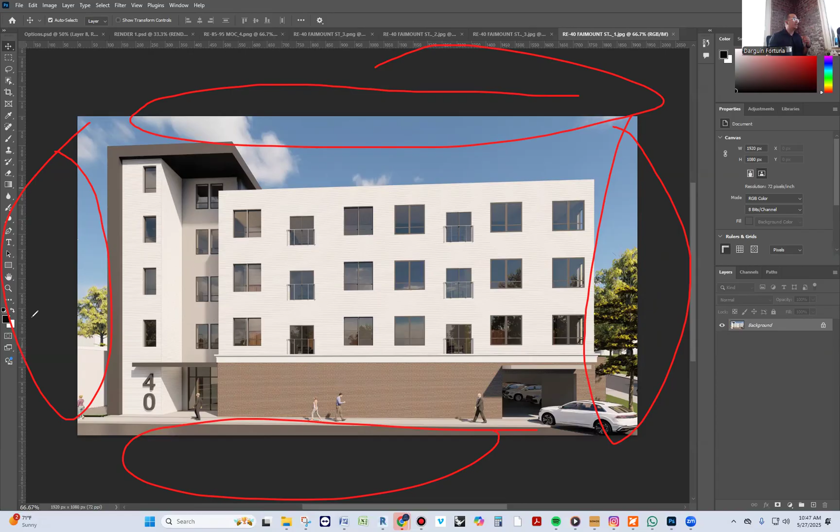So this crop is a little too tight to the building. That's one issue - it doesn't give room for the imagination to see the landscape, how I can walk through it. The other thing it doesn't do is give the person putting together a presentation enough room to crop. You can't really crop much or reduce it because it's limiting. Sometimes giving more sky and ground so people can crop around it helps the designer work with it and have a little more room.

There were a couple things though that I corrected on some of the previous iterations which I want to apply on this one. If you think about this facade, it's about 80% or 70% windows. When you have all these windows, before they were black and didn't tell a good story - they looked black, didn't show the sky. This one shows a little bit of the sky and it feels so much better.

So this is an amazing improvement from the previous ones. The previous ones looked all black. We do not want to do that. We want to make sure they feel alive, that they feel vivid.

So we talked about the cropping - let's enlarge it a little bit. We talked about the windows - let's make it a little bit more bright.

All the things you can do - although this one doesn't have that problem - don't ever cast shadows on your building. This one is fine, it's not too much because it gives perspective, but don't show your building in shadows. Make sure you move the sky or the sun so it doesn't show any shadows.

Another thing I wanted to add: I like to show as little clouds as possible. I do not like seeing clouds in any of the renderings because clouds are scary, are creepy.

Like, oh, it's gonna snow, it's gonna rain, it's not happy. It's against anything that's happy.

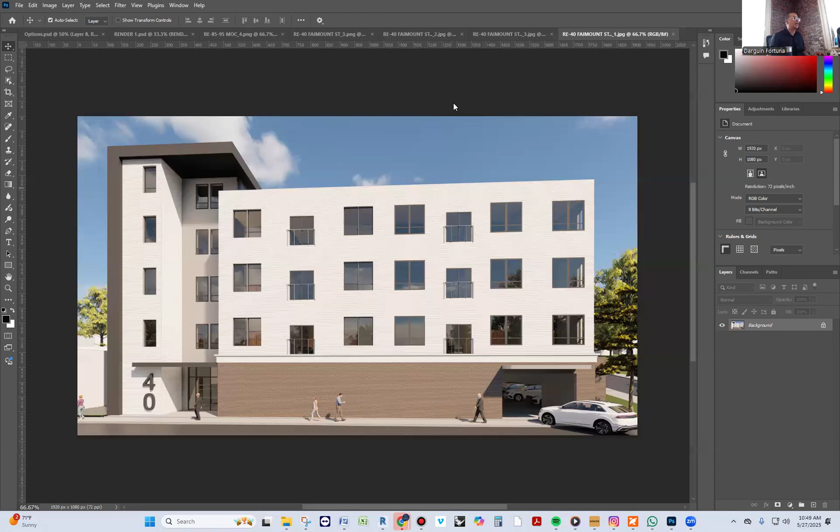So that would certainly help. This is not too bad. I would probably still go to the left a little more, to the right a little bit more, and maybe more to the sky. The ground seems to be fine. And I don't want to be subjective, I want to be objective. So what I mean by the ground seems to be fine, I don't like to see too much sidewalk - I mean too much asphalt. So this is not too bad.

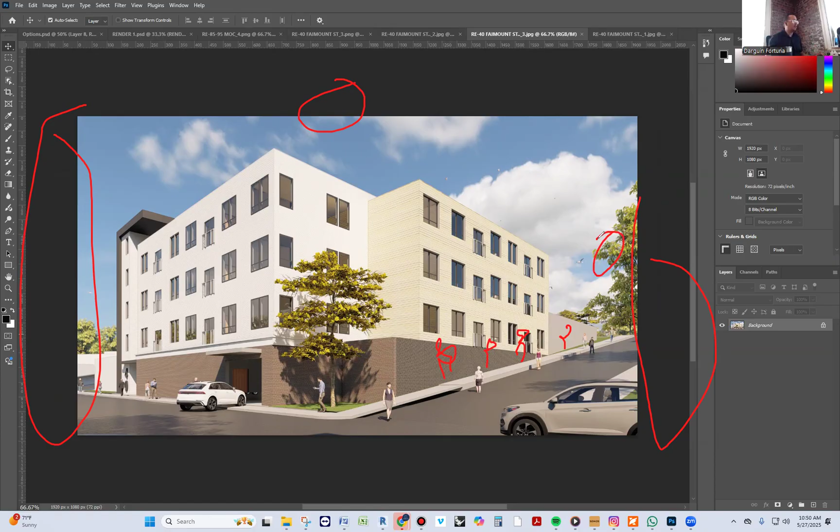It's just enough. But some trees, even here, some trees - the eye just really likes to see landscape, nature, happy. The fact that this tree is kind of yellowish doesn't help me that much. Having it a little more green, more happy. This is perfect right here. This one's really good. It's just having that nice feel of happiness that we want to see on the building. We want people to be excited about the building.

And then overall, the people seem to be okay. I like to see families walking, kids walking, things like that - that's happy. These people have no purpose. This old lady seems to be underground - half of her leg is underground. So it's like, it feels like, tell me a story about this. This guy with his phone is fine, he's cool. This lady here, kind of lost, a little weird.

Plus, you don't walk like that, by the way. You wouldn't walk in the middle of the street - that's called jaywalking. So you would want to have a sidewalk or a crosswalk, they call it here, and some sort of crosswalk in here too. And they don't walk randomly on the street - they will be walking randomly on the sidewalk, but they wouldn't walk randomly on the street. You're like, Dargun, why are you paying attention to that?

It's just all of these things - think of it as a symphony. Every note, every instrument tells the same story. If one instrument starts sounding out of tune, you feel it in your ears. So the eye also tells you something isn't right about this. This doesn't feel right, this doesn't feel right.

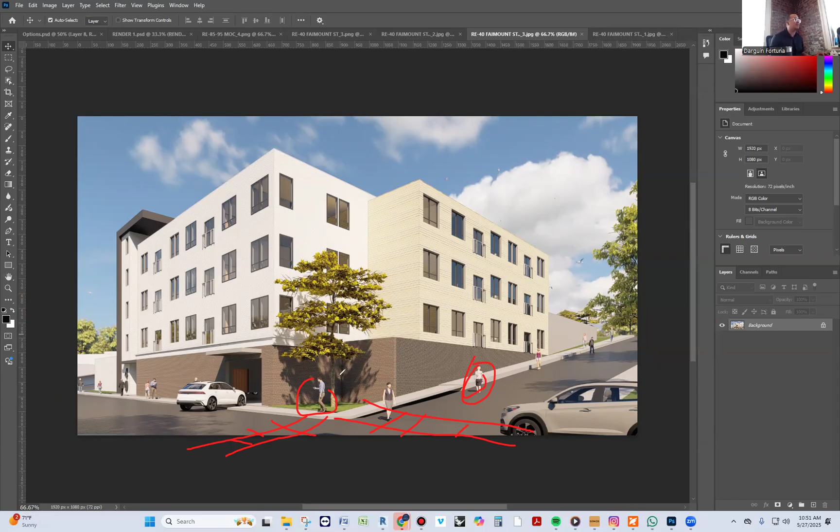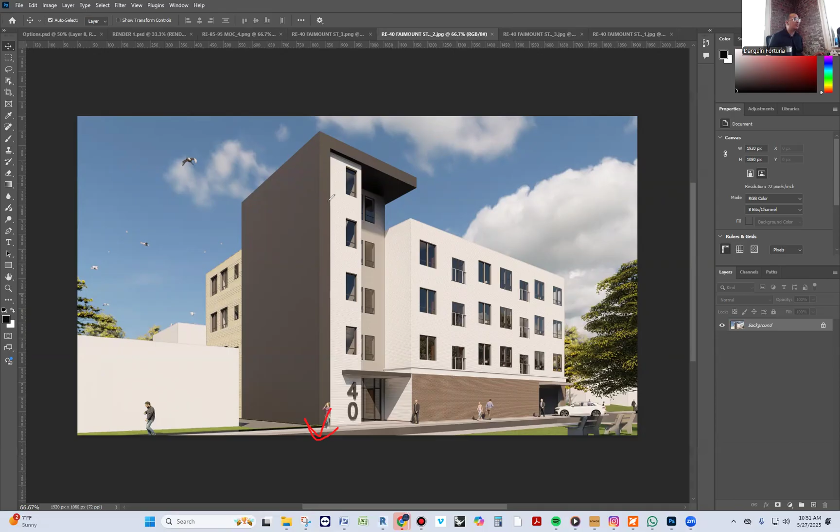So overall, this one is not too bad either - it's an improvement upon the previous one. The windows are better than black, things like that. This one, I need a little bit more ground, and I just told you I don't like to see so much asphalt, but this one is cropped too close, so it doesn't give me, and a little more sky. Because if someone makes a mistake cropping it, then it's a problem there.

Maybe I will crop less of this side because this building doesn't matter so much. Just a little less, more on the ground, a little more on this tree. And why not put a tree here? We don't know what's going on with this existing building, we don't care about it. But just make it a little more happy, more fluid, more fun. And I'll show you a couple of things you can do very quickly that will improve all of these renderings.

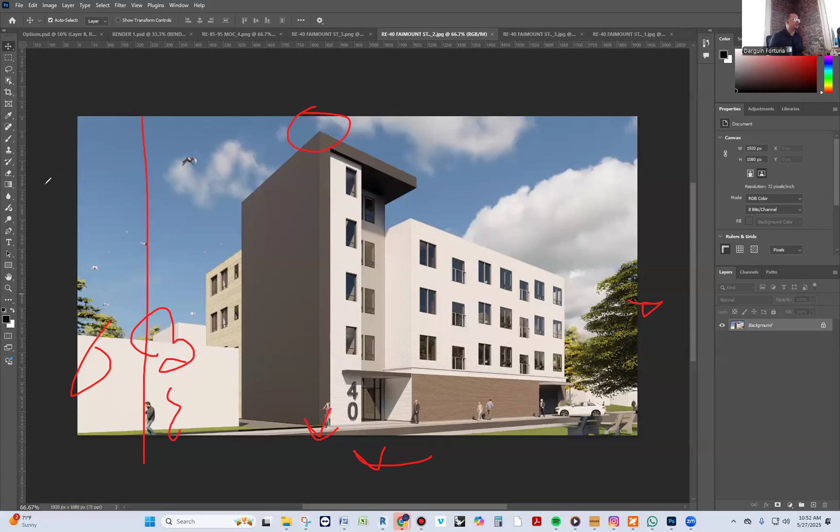Okay, so that's that. These were some of the, I think, old ones. So you see how black - these two, both of them have this dark, sad feeling to it. Very kind of like almost fall - the trees' leaves are kind of about to fall. It just doesn't feel right.

By the way, this is not framed wrong. This is good. This is enough space here, almost enough space here, a little more higher, and you're golden. This is a very good view, very nice view, very welcoming view. I like this view very much.

I really do, and I think it tells a little bit of the story of the building too. Random thing, this seems to be flat versus this that has some texture. Not sure how that happened.

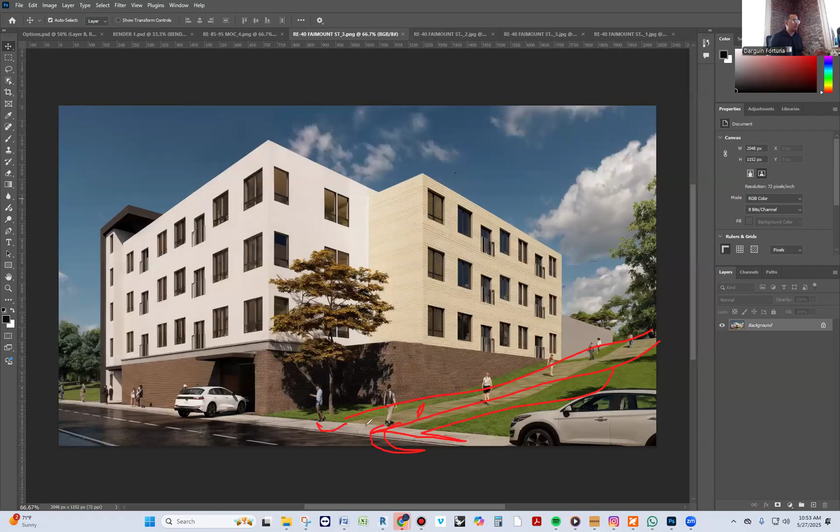This is a street, so this is kind of wrong, right? This should show a street. This seems to be wrong. But the view doesn't look too bad, just be accurate. Like, is this a street? Wait a minute, why isn't it cut here and a curve here? Try to figure out how to show that street as much as possible.

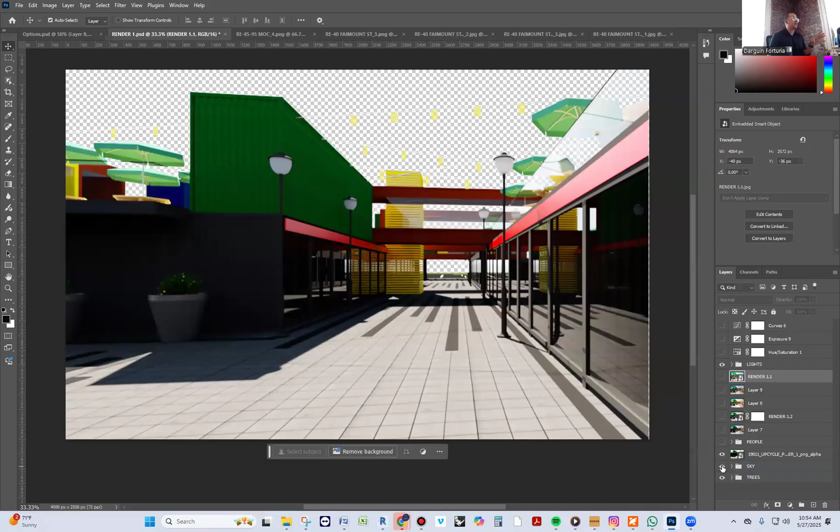So the first thing I did was add a sky. This one didn't have a good sky, so I added a sky. Then I started working on adding people into the scenery. Started adding people into the scenery.

By the way, I grouped all of this, so let me show you. So I started adding people, the guy with the dog looking at the signages and things like that. You're like, well, that's a lot. Let me just go little by little so that you can distinguish it, because it takes a little bit of effort to see all of the things I added.

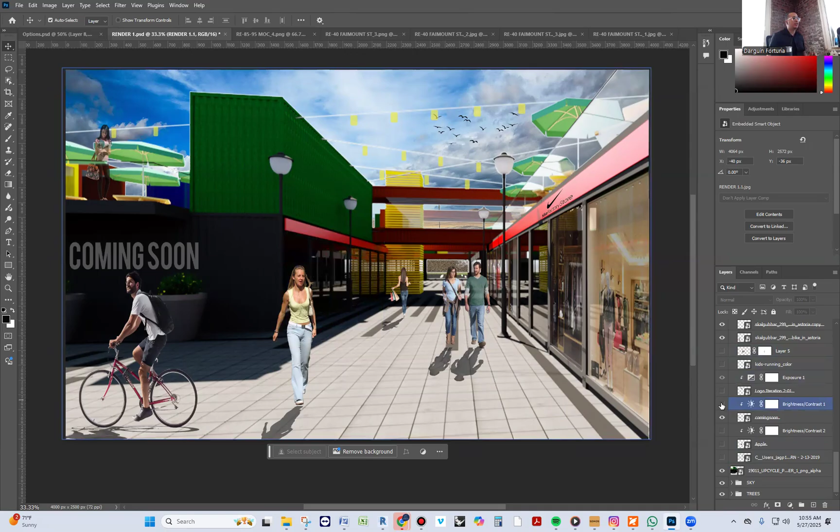And you're like, well, that takes a lot of time. It doesn't have to, it actually does not have to take a whole lot. So just be strategic and have a plan for what it is that you're doing. Before, the plaza had no story being told about what stores could be there, about people shopping, about being something vibrant and happy. It had no story whatsoever.

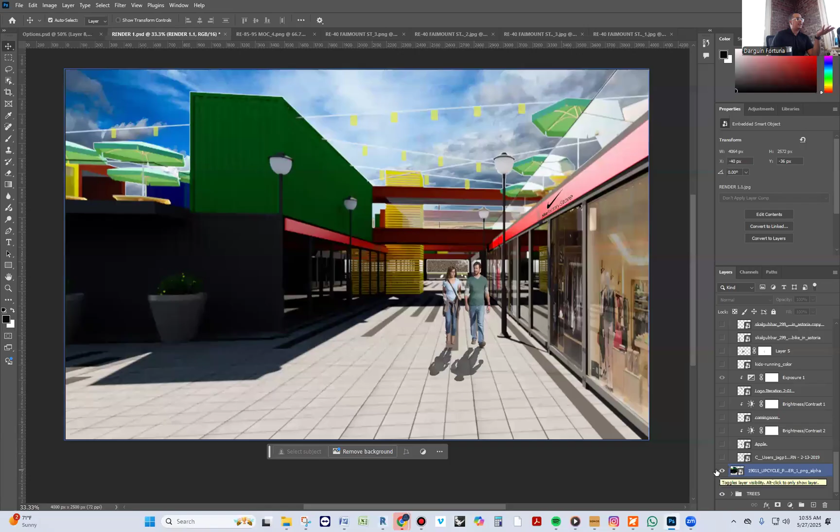So then I started adding people walking, and I created the shadows for the people myself, looking at the fact that the building has shadows like that. Then I started to add the logo, the Upcycle logo, and pop it up a little bit.

Then I like to overlay lines. So if you can figure out a way of getting the same view and getting the line work from Lumion, do that. So I overlaid the lines on top of it.

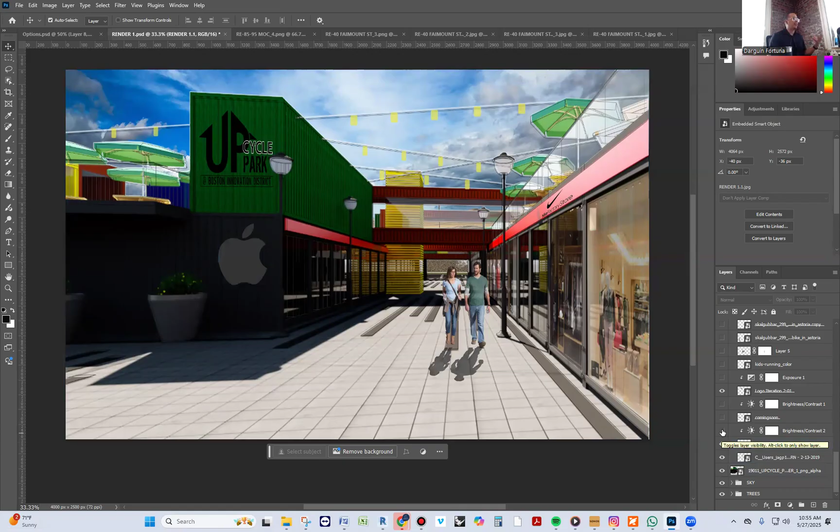Then I put the Apple sign for a store that people know about. Then I put 'coming soon' for some areas, and the eye starts kind of making a place out of this thing. Then I added a person running in the back, a group of people running in the back.

Then, one thing, all of these glasses didn't have any storefronts. I added random little storefronts and played with the perspective to show that there is something in the background. So this storefront that you see here with 'shop,' I added it right here. This is not there, and that's how you would do something for the windows of your building. You can look for windows, things like that, and you can add it.

I added this lady, I put the shadow of the lady. I put a person up here, getting a nice... calling a friend or whatever. Then I added the guy with the dog, and I put the shadow of the guy with the dog, basically by mirroring the same guy upside down and making it black. That's how you do the shadow.

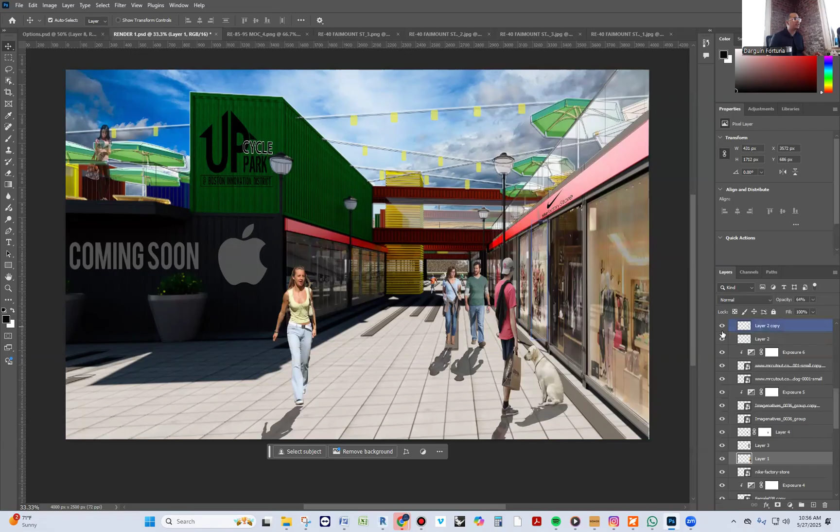And I started putting more storefronts, Puma, signages, another couple walking, and made it a little smaller because of the perspective going forward. Then you can put more things in here. You can add 'coming soon.' You can add Boloco, some stores that people know about. We can add some things, and keep on going.

And then look, I added this guy on the bicycle. I added different elements. Then in here on this one, I added a kind of color wash to it. And you will say, how do you do that? Well, I'll show you later. Duplicated the same image and worked on it with a tool called Camera Raw, which I'm going to show you in a minute. And that's how we went from a blank piece of rendering to something happy.

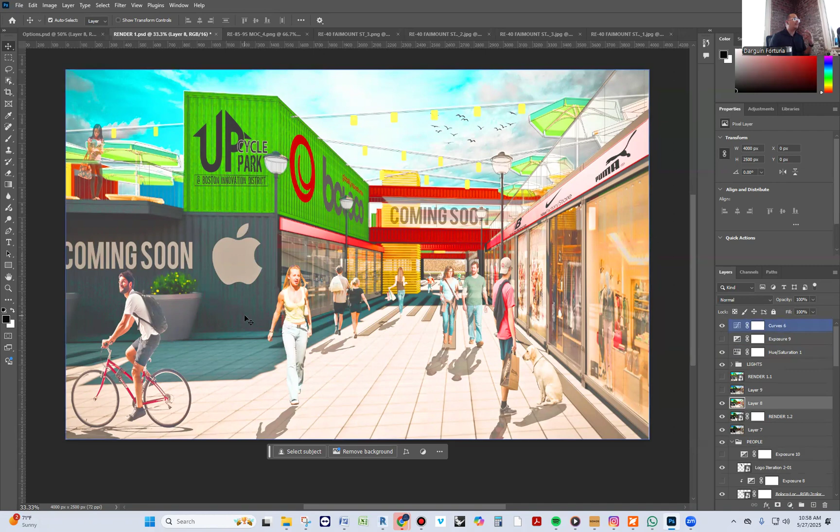And then I made it even brighter. I added more brightness to it, played with the colors a little more. And look, we went from something completely sad to something completely happy. That's exciting, that's welcoming, and it was a very raw look. Even the texture of the coming soon and all that stuff, I revived it. I worked on it, it was really ugly and sad.

So that's one option, and it was all literally a bunch of duplicating views, putting images, putting people, and controlling it. I know that Lumion does a lot of the work for you and other rendering softwares, but you should have agency as a designer for what the story that you want to tell needs to be.

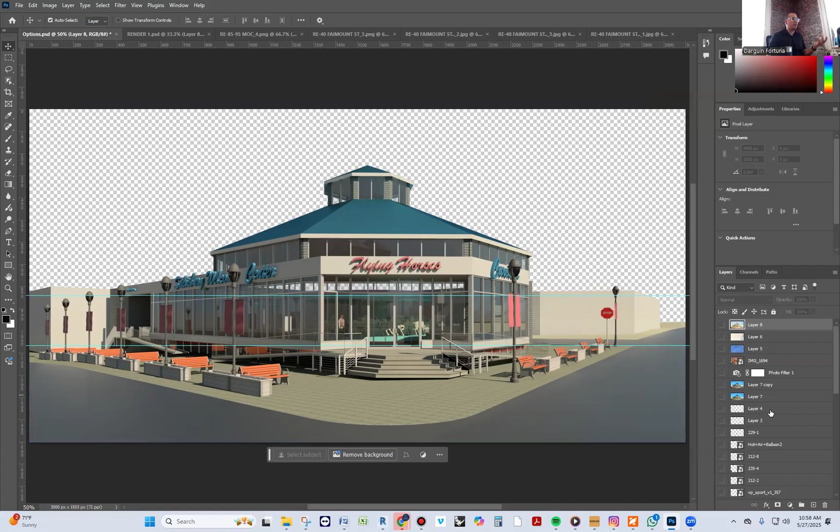This is another one. It came out of Revit just like this. This is how it came out of Revit. And what do I do? Well, first things first, I put a sky. And you see how the sky does not have any clouds or anything, it's just a very strong contrast. It helps.

Then I started adding - so the images look funny with the carousel, there's like a horse carousel there. So I cropped it and literally copy and pasted the carousel in there to make it open.

And I started putting trees. You're gonna see how the trees start showing up, over and over. This person walking in, invited into this place. Just the same bushes. I have all of these assets, by the way.

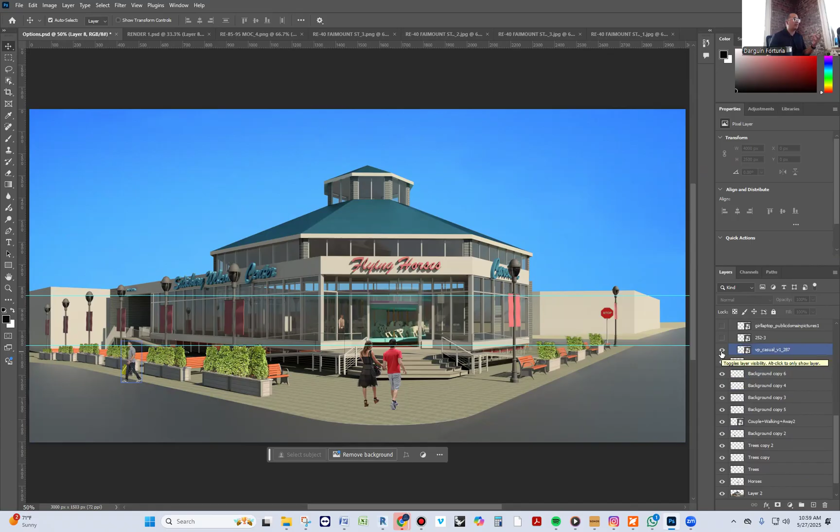I have all of these Revit - not Revit, but Photoshop assets in a folder. I can share it with you.

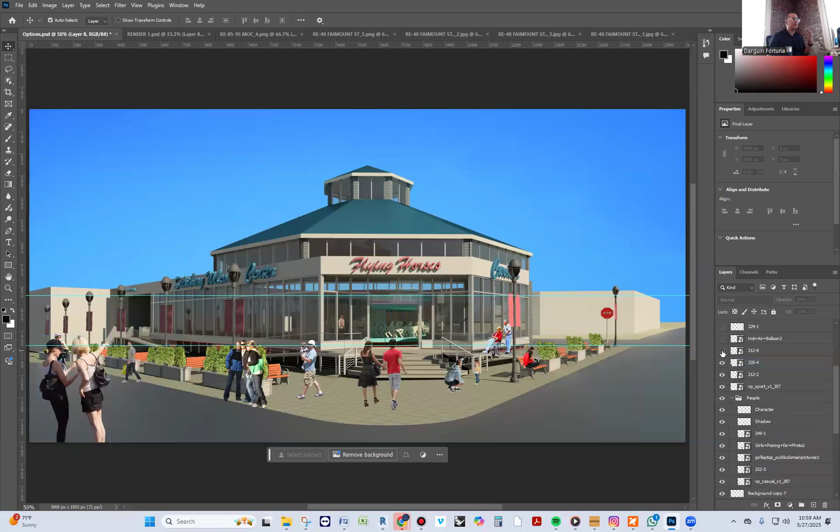So an older couple going into the ramp, representing that this is welcoming for everyone, right? A person doing homework outside, someone taking a selfie, person on a bike going by, a little baby in there, which is kind of random, but hey, now it makes sense. The baby has a guy that's saying hi to him, right? So the couple walking, people pointing at the building as something cool, something important, something fun. But everyone here is trying to tell a story.

A hot air balloon - you're like, why the heck did you put a hot air balloon on this thing? It's not a real thing, but at the same time, it's a happy thing and it's exciting. You know, I put the glass in front of the people so that the people fade away a little bit more, the glass. Then I brighten it all up so that everything looks cohesive, because these images are coming from different places, so it feels out of place if you don't give it something. So I put a filter on it right here.

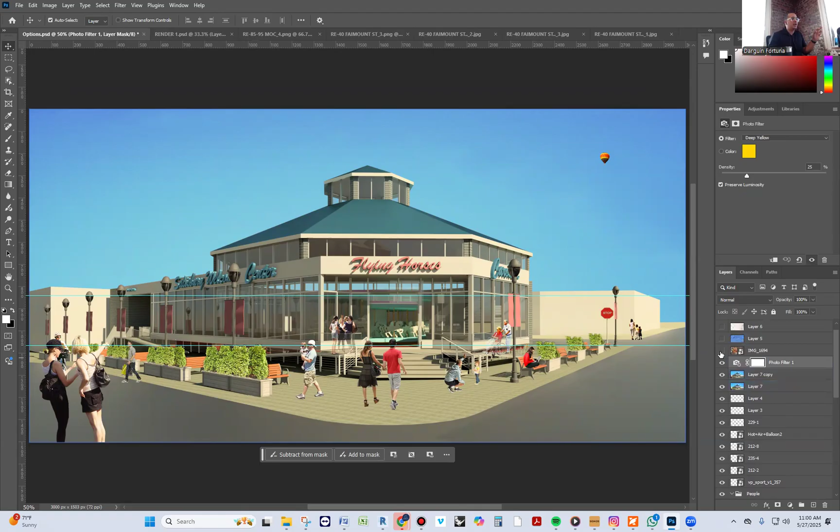So then you go forward. I added another filter on top of it, which kind of gave it a nice dreamy feel to it. I added a texture on top of it. Literally, this is a texture, a watercolor texture on top of it. Then I added a blue texture on top of it. Then I added another texture on top of it. And this is what I ended up with.

So you see how you went from something completely blank, completely sad, completely 'oh my gosh,' to something cohesive, fun, and exciting. This is not even the final - the final one looks way better than that. But this is kind of how I went about it.

So I'll do the same very quickly to one of your renderings. So now you saw that example. Good. So let's work with this one.

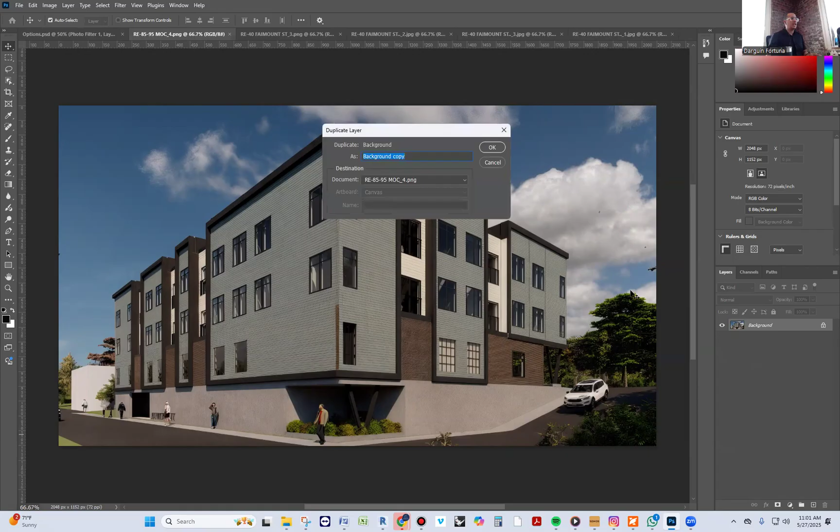Okay, so what do I do? The first thing I do, I duplicate this layer. I like to always create different layers of this. The second thing I do - this texture has a problem. Instead of going and re-rendering it, you have to make sure your base image is as good as possible. So you can use the clone tool. You go to clone, there's a clone tool around here.

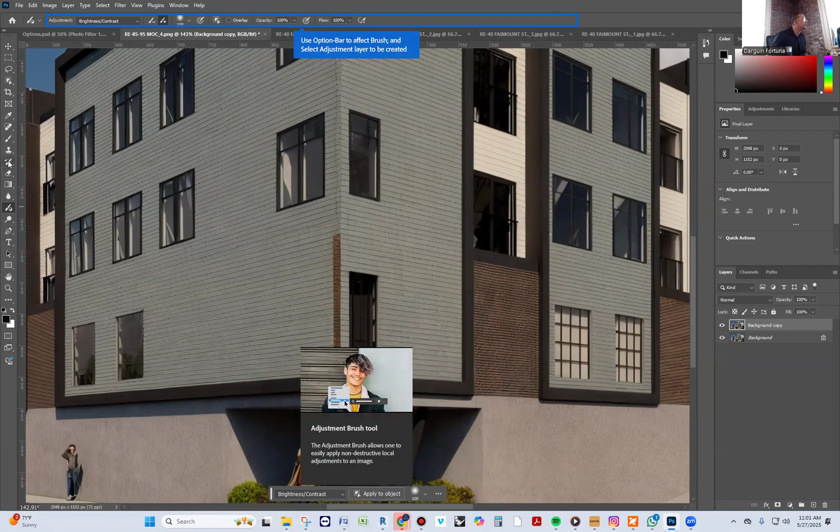Where is it? The stamp. This stamp allows you to literally clone, and you can make it bigger using plus, plus, plus.

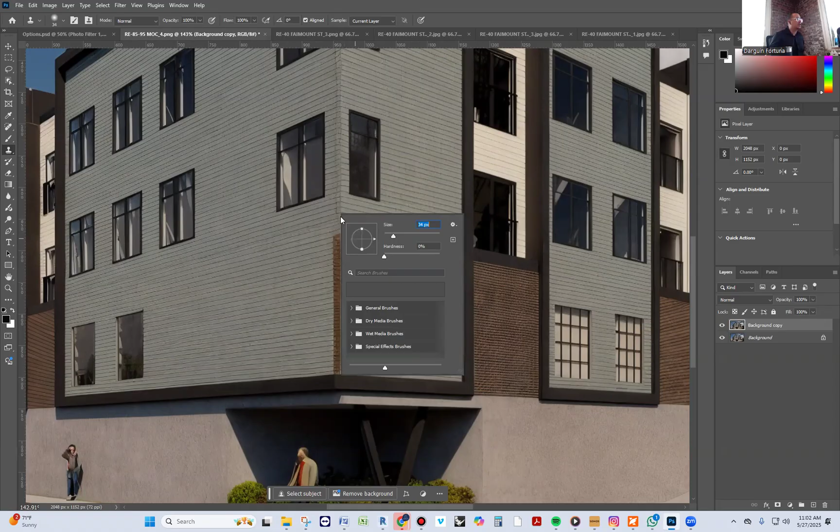You can select what you want to clone. Click Alt and it allows you to clone, and you can repeat that clone down, down, down. I'll make it a little smaller. Oops, my bad. So you clone, and then you just go straight - clone, clone, clone, clone.

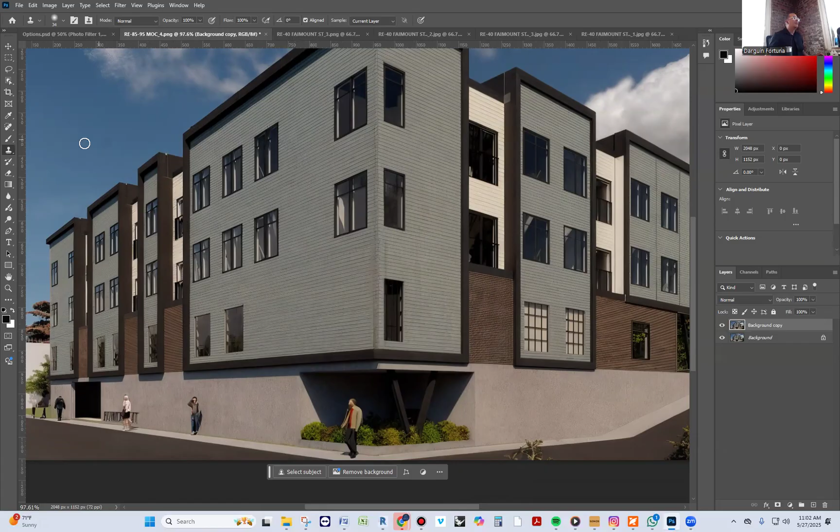You're like, well, that one's not perfect. No, it's not perfect. You could do it in another way, but it's better than what you already had. Trust me, it really is. You can do different things, actually go straight down with it. It already helps. It's not perfect, it's okay, but look, that's already better than that.

Okay, very quick, another thing you do - I always like to go into an area called Camera Raw Filter. Really, really love that. It should be your favorite tool, please try to use it. So Camera Raw Filter, let's get started.

Camera Raw Filter allows you to control almost everything separately - colors, lights, things like that. What I typically like to do is brighten things up. Dark equals sad, brighten equals happy. Look, that's already way better than what it was before.

So you just go into exposure right here. Contrast, you can work with the contrast a little bit. Too much contrast makes it look fake, too little contrast makes it look too dreamy and too vague. So find the sweet spot between contrast and too much contrast.

Highlights - too much highlight, your eyes want to close when you see it. Too little highlight is creepy. So you got to find the balance between the highlights too.

All right, whites - too white, too little white, just play with it. But your eye tells you, because your eye doesn't lie to you. You see things every day, so your eye doesn't lie to you. So you can work with the blacks, then you can work with the colors.

I wouldn't mess too much with the colors because we want all the renderings to look the same. If you start changing this, you have to save it as a setting so you can repeat the same setting. So I wouldn't mess too much with it until you learn how to save it as a setting.

Texture - you see, sometimes there are areas that look flat. If you go into the texture, it adds texture to it. The brick looks richer, things look a little bit better.

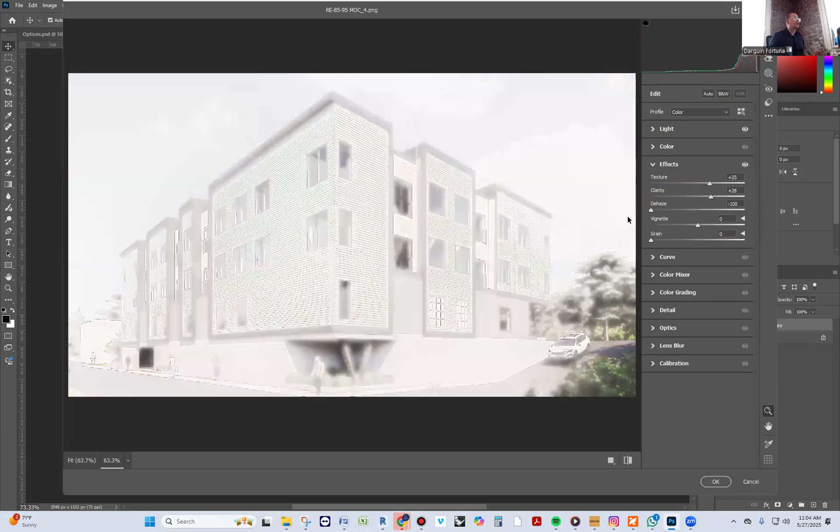Clarity - too much clarity makes it look creepy, kind of like too much, it's just too much. Too little clarity makes it too dreamy. You have to find the balance between one and the other. Dehaze makes it too sharp, too much haze makes it too dreamy, so you got to find the sweet spot between the two.

Vignette, I always like vignette - not too much, not too little. A little vignette makes it look a little more focused. Grain, I don't like too much grain, it looks too dreamy and too fake. So not too much, but that's that.

Another thing I always like to do, and this is also a matter of preference - these are all the tools right here, this is the lighting, this is the color, this is the effects. On color, I sometimes like to revive the saturation so it feels a little happier, not too fake. I like to revive it a little bit, not too much. Sometimes I like to kill it too - it's a matter of what look you want to go with.

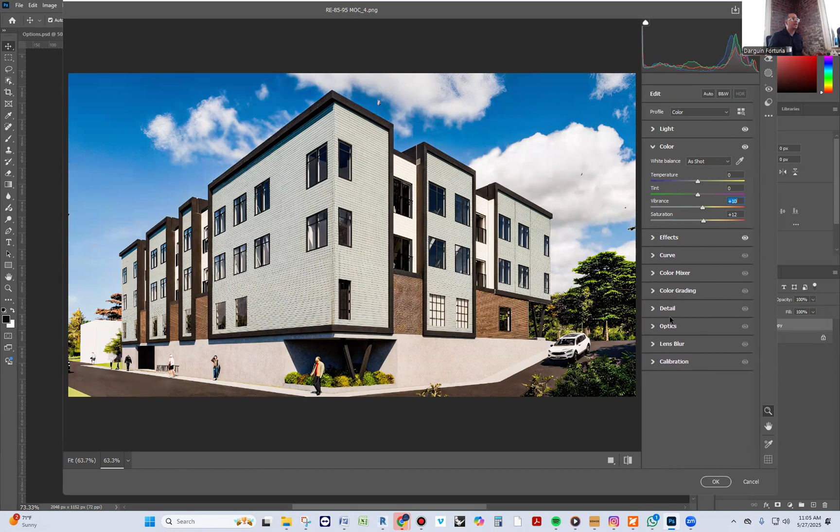That's one - it went from that to that in a second. I'm explaining it while I do it.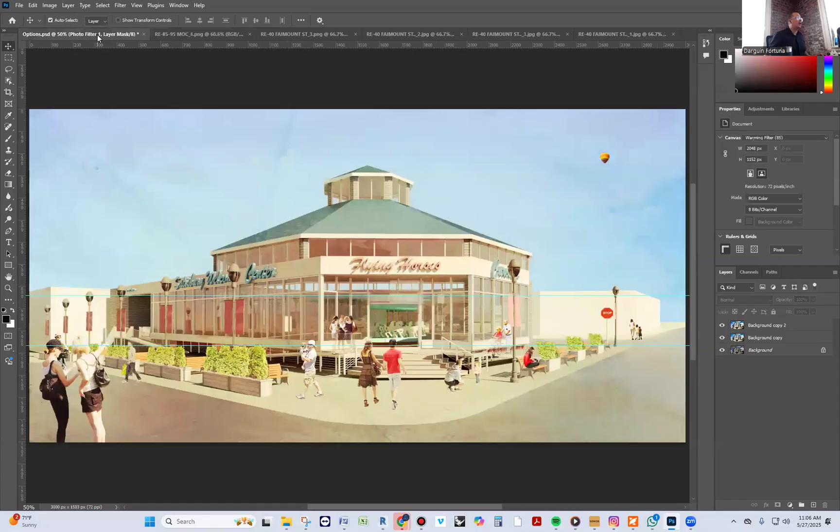You see how that looks? Sweet, sweet, sweet. All right, what else? This you don't have access to, but I'll get it to you. This paper right here, you don't have it, but I do. So what I do is I grab it from here and drag it into this one, drop it on top. It gives it that kind of watercolorish look.

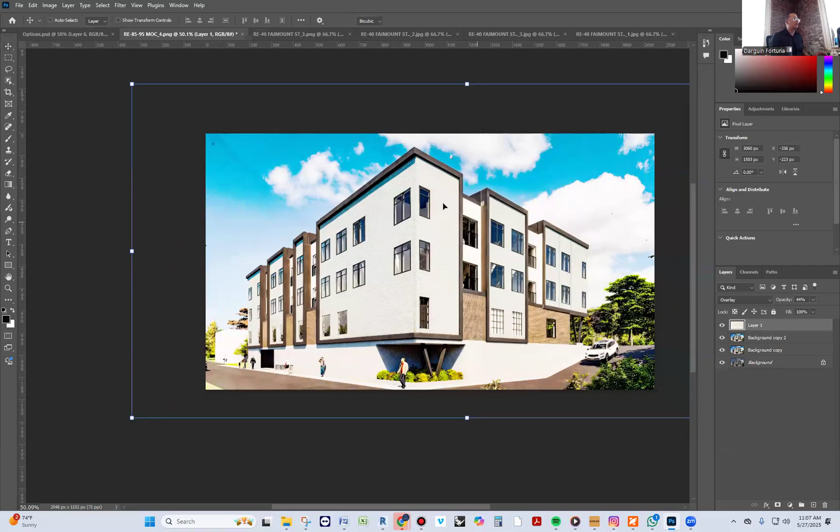Okay, so it's like that. It's just a paper, literally a paper with an overlay. And you're like, oh, that's not doing anything. Yes it is, it's making it way happier than what it was before.

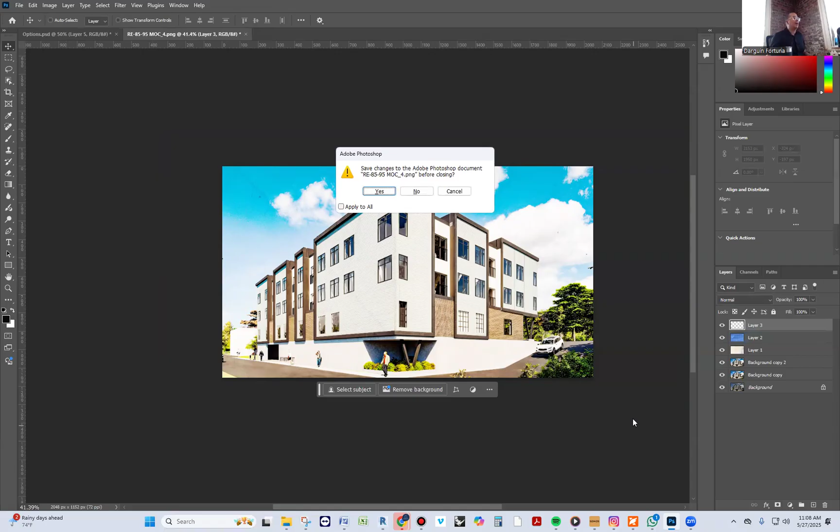One thing I like to do too, you can create another layer and click Control Alt W. Control Shift W, oh my bad, hold on, Control Alt Shift W. Oh, it's not working for me. Hold on one second, this is live. Control Shift W. Oh my bad, so Control Shift W isn't working because I haven't saved it.

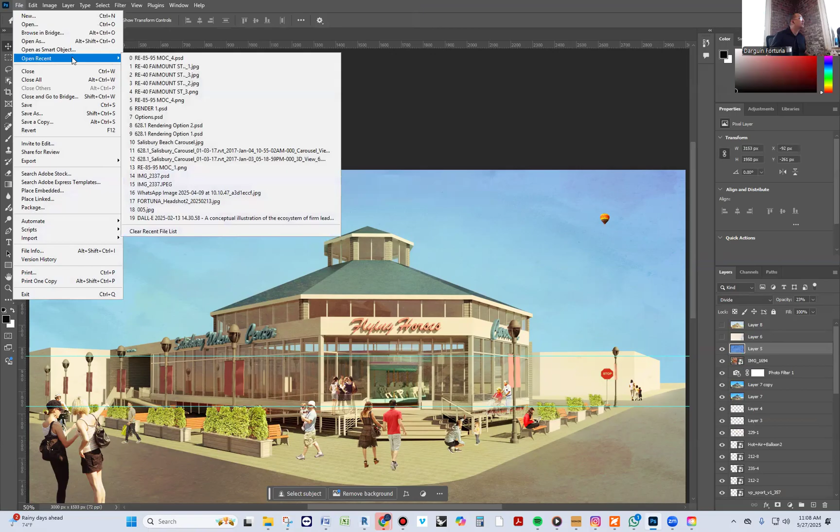So let me save it. Bear with me, I'm gonna save this on my desktop very quickly. And I'm gonna do now Control Shift W. Oh, it just closed it. My bad, oh sorry guys, I just did this before I met with you. But it is a tool that allows you to... my bad.

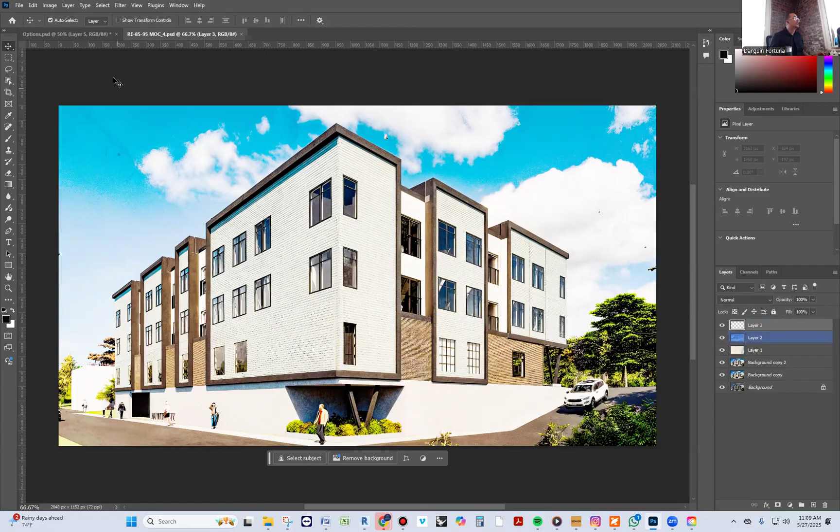So Control Shift E makes all of the layers into one image. Control Shift E. Control Shift... Control E deletes one of the previous ones. And so that's that, and so this is a connection on that.

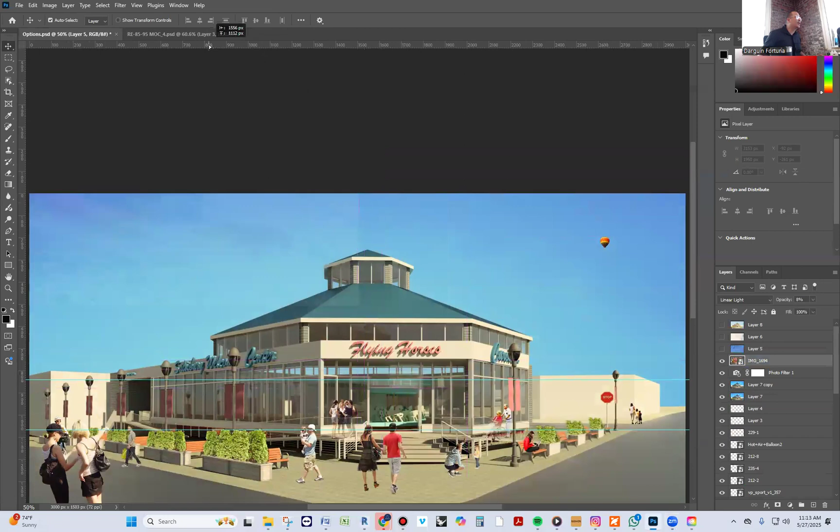All right, sorry about that quick interruption for a second. So we have all of this done here. Like I said, adding random things like this hot air balloon adds a touch to it. Adding this kind of watercolor look to it really makes it way happier, way more exciting.

You know, the base renderings that these softwares do, AI will replace you if that's all you do, because AI could do just better than us. But this creativity and textures and colors and feel, oh babe, AI will never get to that. It's just never gonna get to that. And I'm a promoter of AI, as you guys know, but it's just never gonna get to that level. That level is the humane side of architecture, throwing that little air balloon there.

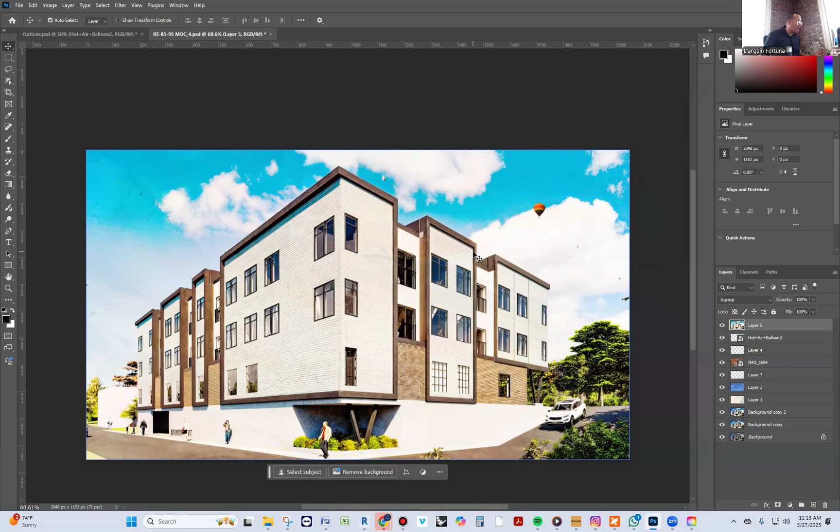Another item I want to add real quick, a little nugget for you: Control Shift E creates a render version of the final. Control Alt Shift E. Okay, so you do Control Alt Shift E.

It's kind of funny to do it with your hands, but it creates a render version of the whole thing. Now I add the final touch to this thing. I like to do lens blurs and lens flares.

This one right here, it's not that great, I don't like it that much. But there's a lens flare you can do under filter, lens correction, vanishing point, blur. I like the lens flare. Gaussian blur is pretty fun too.

It makes it more like sketchy looking, you could tell. Makes it more sketchy looking. But not the greatest. But I want the lens flare.

What is the lens flare? By the way, just so you know, there's a gallery of filters you can use. Filter, and then go to filter gallery, and you can add a bunch of filters to this. Texturize, stylize, artistic.

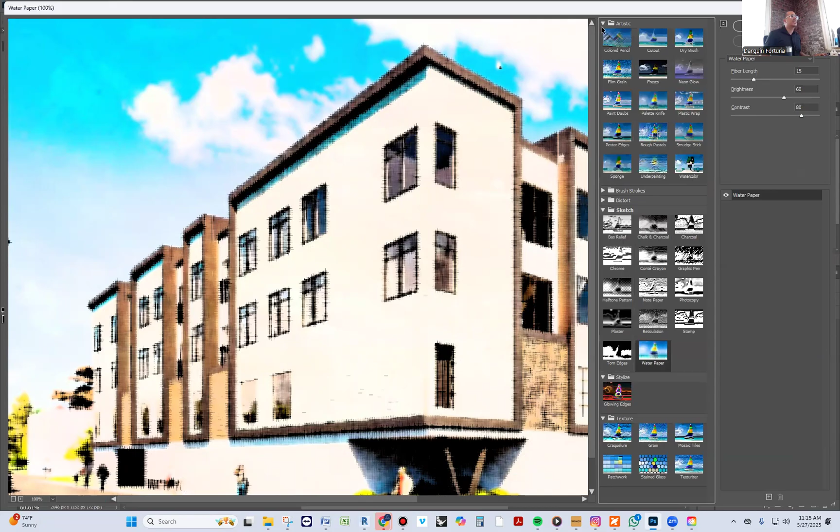But these things are not that great, honestly. They're really not that great. It's good to know about them and test them, but they're really not that great. I would probably use them as an overlay.

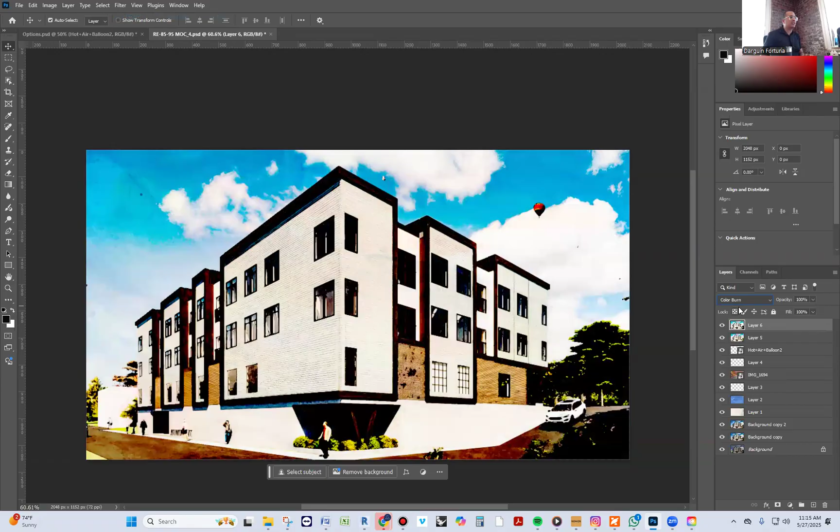What do I mean by that? All right, so you have that one. You create another duplicate of this one with Control Shift Alt E -- yes, Control Shift Alt E. Then you can apply that filter I just created, and do an overlay of it, playing with the different blending tools, and then give it opacity. It's just really a little tool to make it a little nicer.

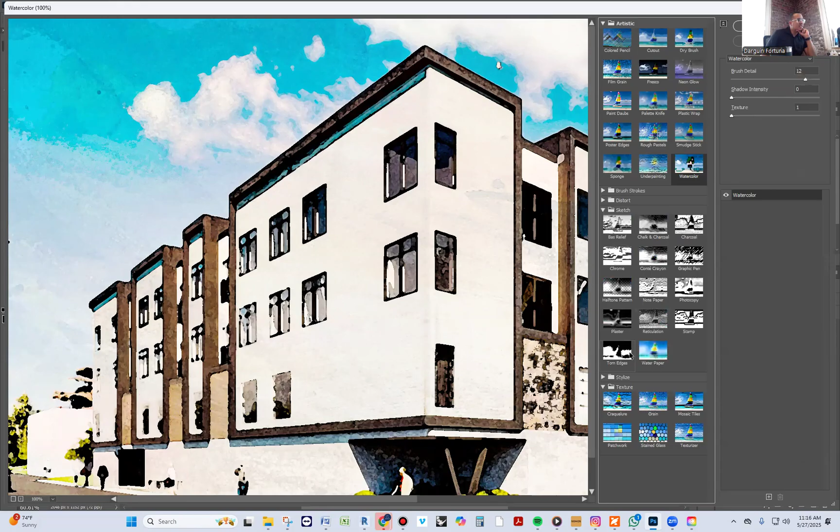Another one I like very much, filter gallery. There's one tool that brings about all the lines -- sketch, reticulation, charcoal, maybe it's this one. Torn edges, maybe it's the torn edges. You're like, why are you doing that, Dargun, you just destroyed your own thing. Nope, you can use the mixing thing right here.

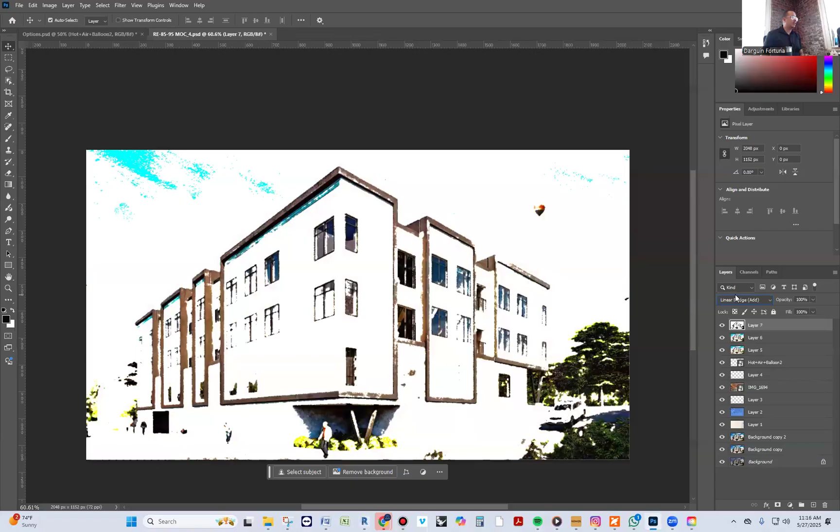Yeah, none of those are helping, this one's not helping. Now keep in mind, I did these last like 10 years ago, so I've lost a little bit of my touch, but nonetheless, isn't this way better than what we started with? And what's better, happier, more exciting. Maybe I did too much -- there are things I may have done too much. Maybe I did too much with that one, maybe that one was better, maybe this is too much too.

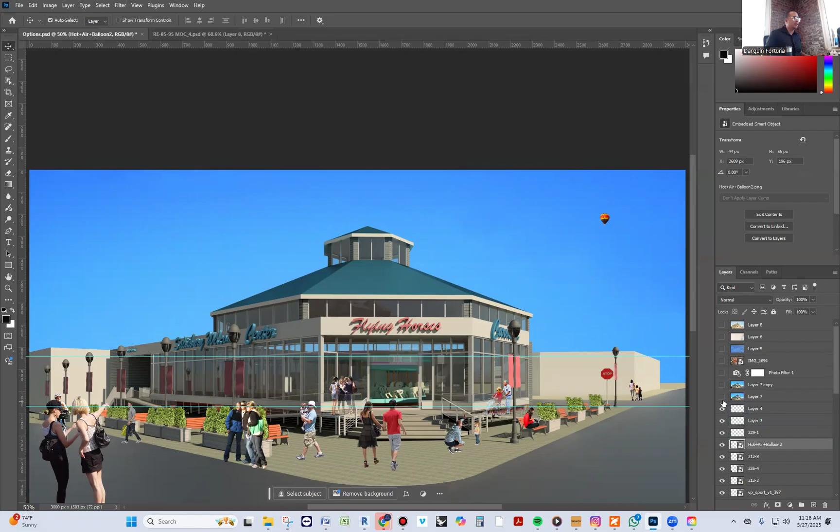Sorry guys, lens blur, iris blur -- but I'll tell you what it is. So lens glare is this right here, you're going to see it in a minute, because I added it to this one. Oh, you can't see it here now, this is not the latest. But it is basically a bunch of circles and light and things like that. Let me see where I can find it.

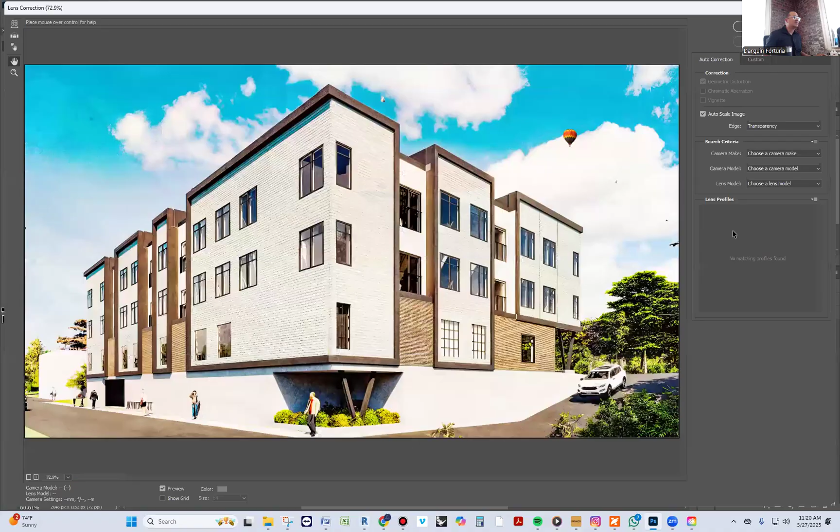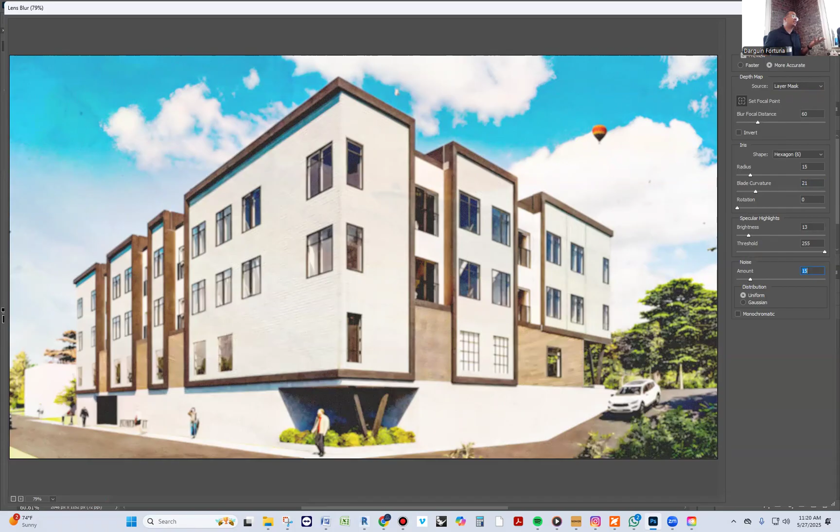Let me see if I can see it one more time real quick. I don't want to give up on the lens correction, but it is something -- no, it's not lens correction. Lens and blur, lens blur -- that's not the one. Right, yeah, it's none of these ones. My bad. Although it does help a little bit -- I won't lie to you that having that tone of blurriness to it makes it a little more friendly.